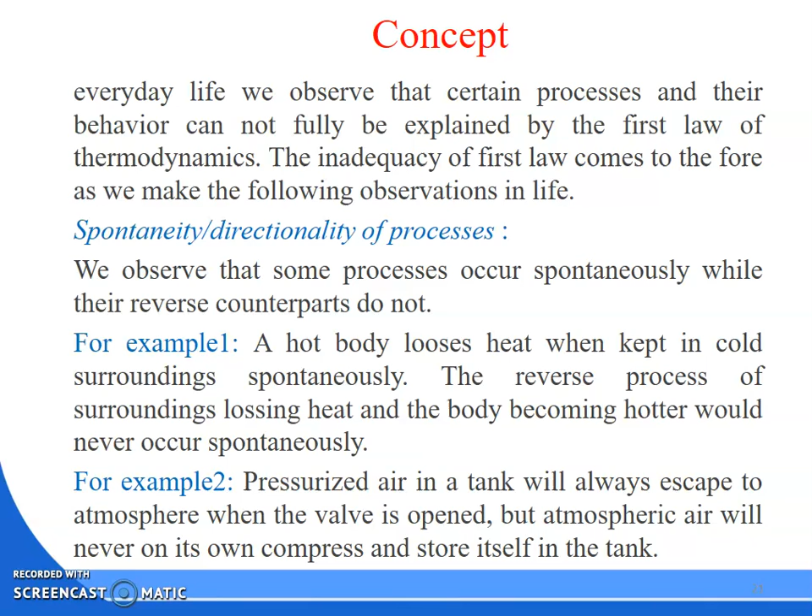Another example. Suppose there is a pressurized tank. If you open the valve of the pressurized tank, then what will happen? Some of the air will go to the atmosphere. But is it possible that if you open the valve, some atmospheric air will enter the tank? It is not possible. So it is also a spontaneous process.

Then another example I am giving. Suppose a fruit on a tree. When it falls on the ground, the potential energy is converted to kinetic energy and the kinetic energy to heat energy, and gets wasted. So is it possible that a fruit lying on the ground will be picked up or elevated because of the heat from the environment? It is not possible. So these are some spontaneous processes whose behavior we cannot describe by the first law of thermodynamics.

So, quality of energy. You know that heat is a low grade energy and work is a high grade energy. It is also seen that not all energies are equal in terms of the ease with which they lend themselves to be converted to useful work. There are so many types of energy available in our surroundings, but not all the energies give useful work.

Likewise, the sun radiates some heat. Can you utilize the solar energy directly to run the fan, to run your water heater? No. That means you have to convert that heat into useful work, then only you can utilize it. So here the quality of the energy will be degraded.

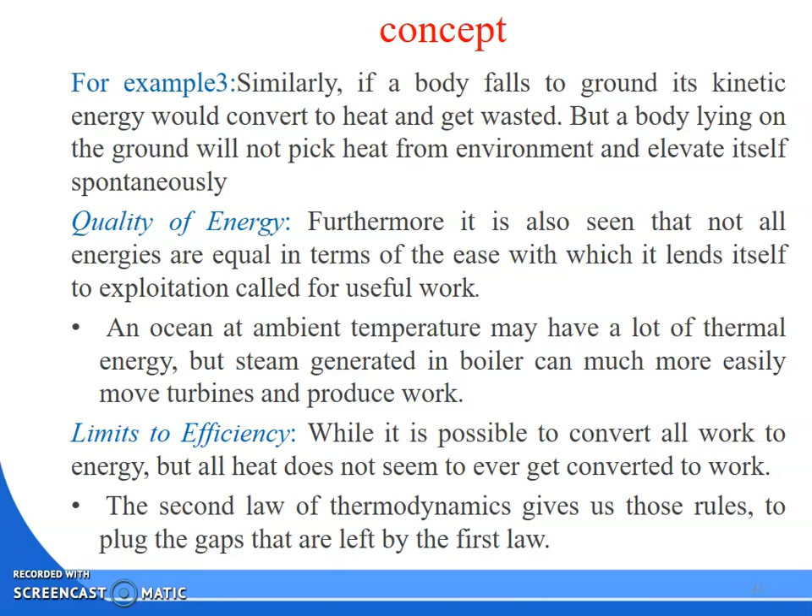Okay. The second law of thermodynamics gives us those rules to plug the gaps that are left by the first law. So these gaps left by the first law will be overcome by the second law of thermodynamics. First, that is a spontaneous process. Second, quality of energy or limit to efficiency. So these gaps will be covered by the second law of thermodynamics. Let me discuss what is the second law of thermodynamics.

The second law of thermodynamics has two statements. One is your Kelvin-Planck statement, another one is your Clausius statement. What is the Kelvin-Planck statement? It is impossible for any device that operates in a cycle, receives heat from a single reservoir and produces a net amount of work.

As I told you, all the heat cannot be converted to work. So if you are giving heat to a system or any device, can you say that the amount of heat given is equal to the amount of work? No, it is not possible. So the Kelvin-Planck statement says that it is impossible for any device that operates in a cycle, receives heat from a single reservoir and produces a net amount of work. That is not possible.

Okay. The Kelvin-Planck statement of the second law of thermodynamics states that no heat engine can produce a net amount of work while exchanging heat with a single reservoir only. So some of the heat supplied must be rejected. Then you get the work. That is possible. But that the amount of heat you give equals the amount of work you get is not possible. That is your Kelvin-Planck statement of the second law of thermodynamics. Next is your Clausius statement.

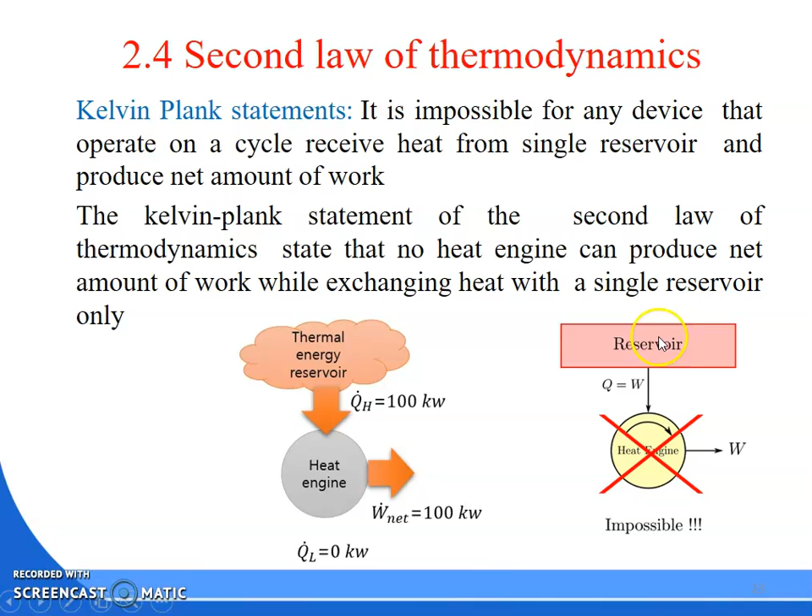So here I told you that reservoir, thermal energy reservoir, is written. So what is a thermal energy reservoir? The thermal reservoir, or simply a reservoir, is a special kind of system that always remains at constant temperature even though energy is added or removed by heat transfer. Okay. So a thermal reservoir is a reservoir that always maintains constant temperature. You may add heat or you may take heat from the reservoir; the temperature remains constant.

Clear? So any physical body whose thermal energy capacity is large relative to the amount of energy it supplies or absorbs can be known as a reservoir. For example, air in a room, the earth's atmosphere. How is air in a room an example? There is the summer season, there is the winter season, you are cooking food inside, but the air temperature is the same. That is the atmospheric temperature. It will not change its temperature because you are cooking food, supplying some heat, or using a room heater. It is an open room. So air in a room, the earth's atmosphere, large bodies of water, lakes, oceans and so on. If you give hot water to the ocean or take water from the ocean, the temperature remains the same.

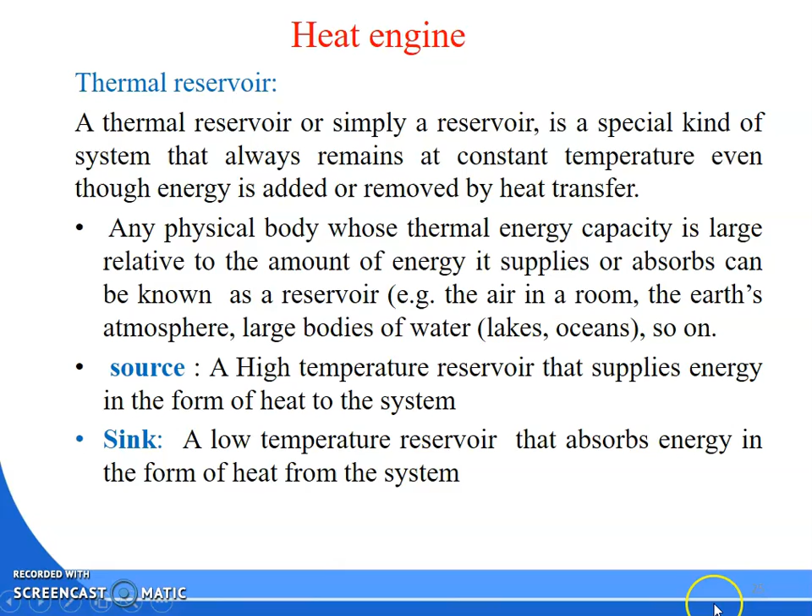So with thermal reservoirs, we are dealing with source and sink. We should know what a thermal reservoir is. It will come in 2 marks. So next we will discuss the heat engine. As we know, the net amount of heat cannot be converted to work directly; conversion of heat into work requires some special device. Such devices are called heat engines. The device which converts heat energy into work is called a heat engine. Okay. A heat engine is a device which operates in a cycle. It receives heat energy from a high temperature reservoir. That means it receives heat from the source. The high temperature reservoir, we know, is your source. Clear?

Sorry for the interruption.

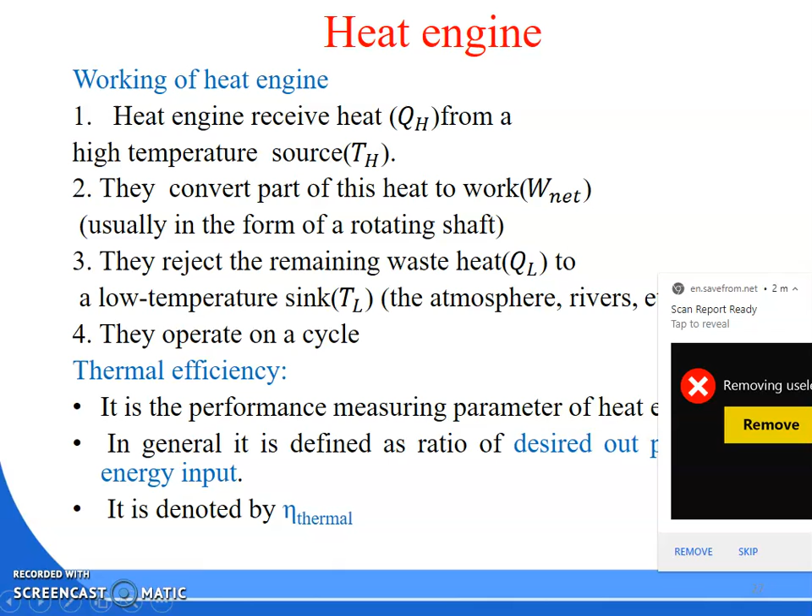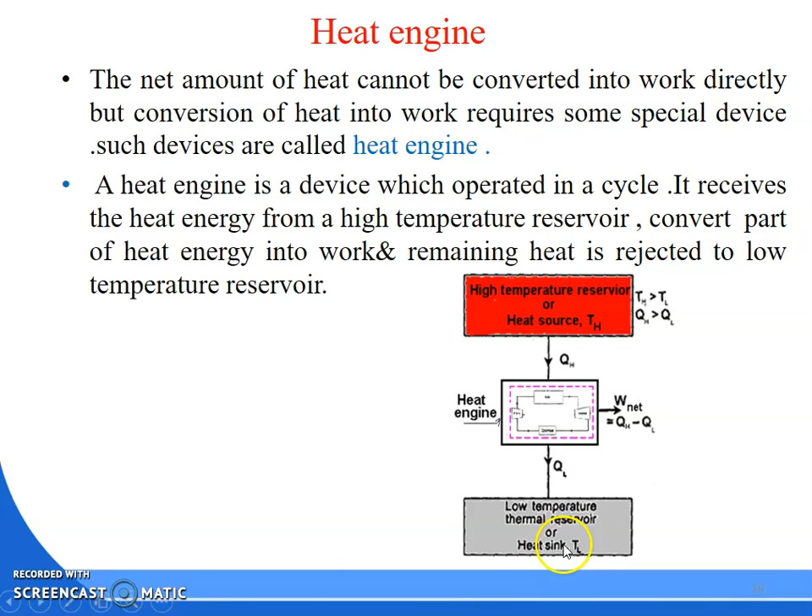The heat engine is a device that operates in a cycle. It receives heat from the high temperature reservoir, that is the source, and the source maintains temperature TH. T stands for temperature, H stands for high. High temperature reservoir, that is the source. And it converts part of the heat energy that the system gets. This is the heat engine. It gets QH amount of heat from the source, and part of the QH amount of heat will be utilized to produce work, and the remaining heat will be rejected to the low temperature reservoir. What is the function of the low temperature reservoir? It will absorb heat.